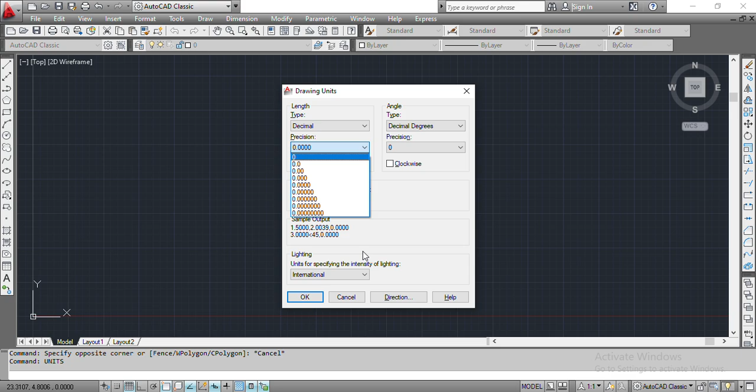So we are going to start with the 3D. To start, we are going to do the page setup, just like normal. We'll type units, and change scale to millimeters, precision to 0.0. Then we are going to set the limits.

The limits: the lower limit is 0, 0. The upper limit is 297, 210, and then we zoom all.

After that, we are going to type UCS icon and type N for no origin, and then change the page on the taskbar to 3D modeling. In 3D modeling, we are going to find all that we want to use there.

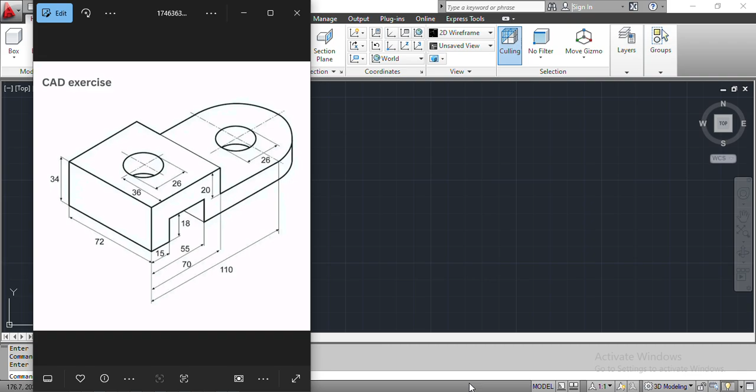Now after this, we are going to start with the whole figure, the whole base. So the whole base is 110 plus 72 divided by 2, that is 36. So 110 plus 36, we have that.

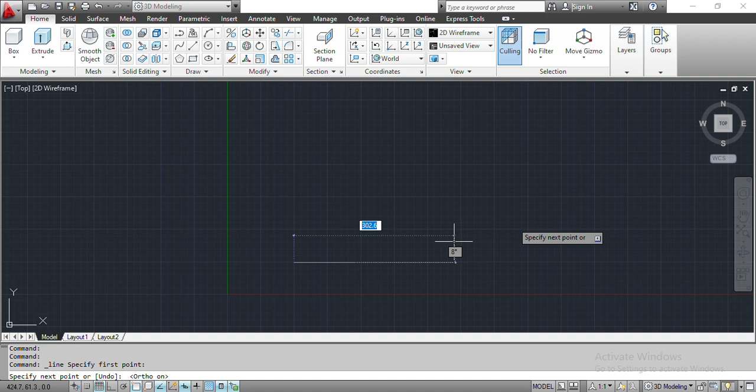So we draw, with ortho mode on: 110, 72, 110, and then close with 72.

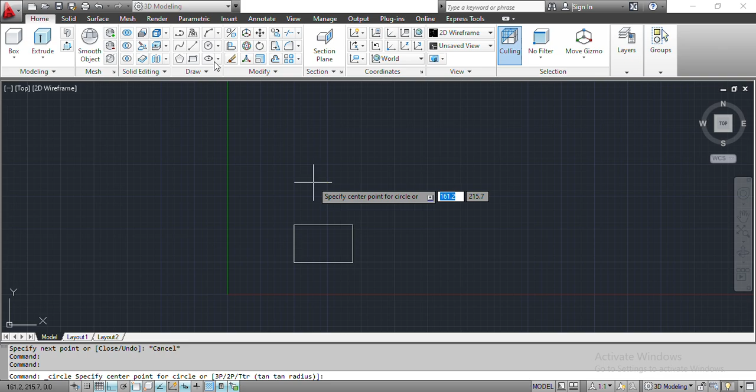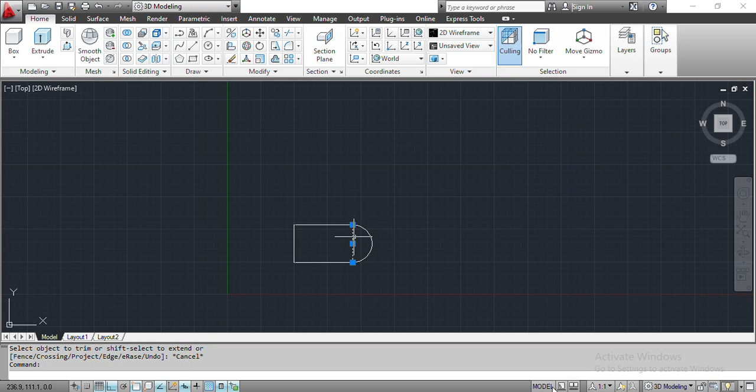After that, we'll get the circle and have it at the middle. Well and good. So after that, we are going to trim, and after trimming we are going to delete that which is not required.

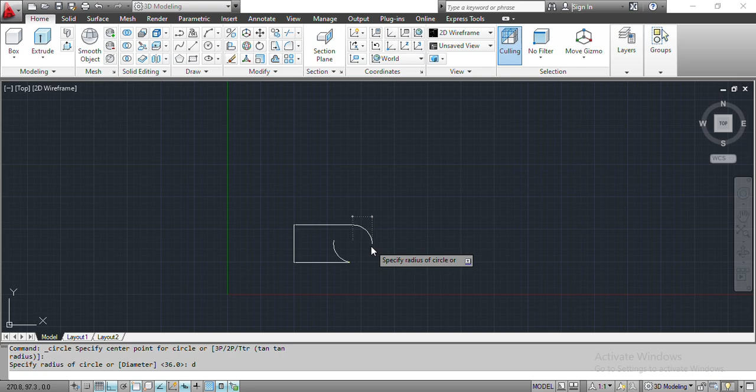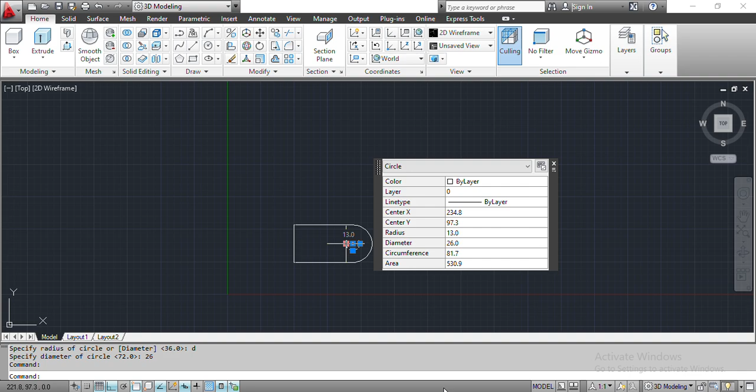We have here a circle of diameter 26, a circle of diameter 26 from the same center. So these two, these ones, we are going to use it ahead.

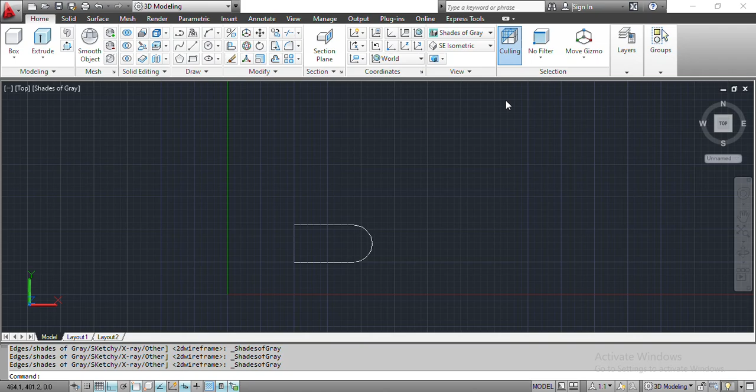So we need to press pull this. Have it to south west isometric, have it to south west isometric, and according to the drawing it is not really that.

Let's go back to the drawing. It's supposed to be like this.

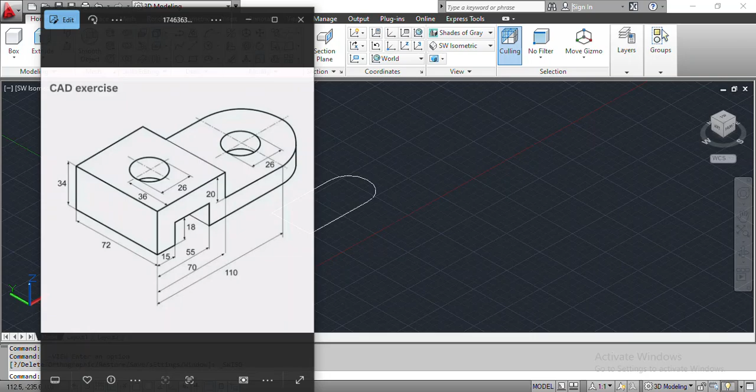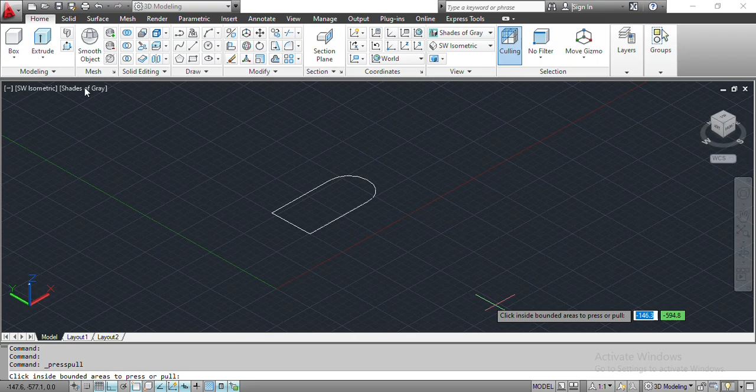So we are going to press pull it to a distance of 34 minus 20. 34 minus 20 is 14. We are going to press pull it to a distance of 14. Good.

After that, we get it to... we have this all done.

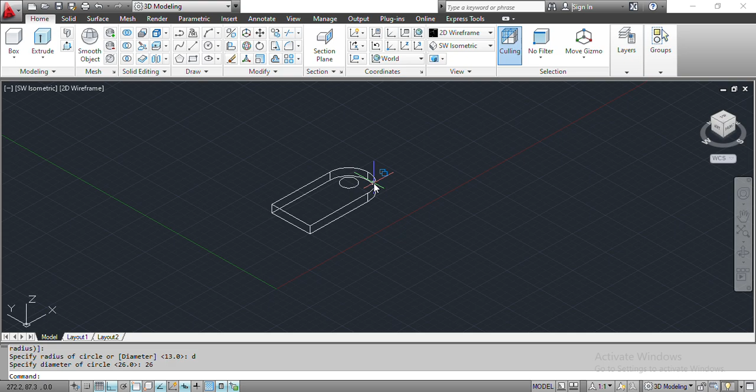So have a circle, and have it at a diameter of 26, and press pull it off.

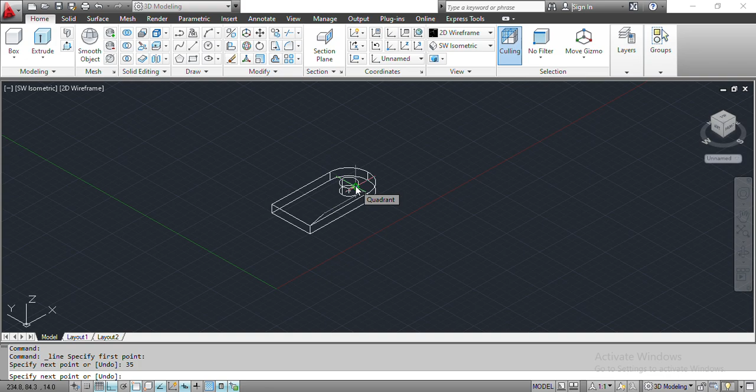And again from here it should go to a distance of 35 and a distance of 36. The midpoint is 35. Ensure you have your ortho mode on.

So instead we can also use copy edges. Then we copy that to a distance of 35.

And we also copy that edge to a distance of 36. Copy the edge to a distance of 36.

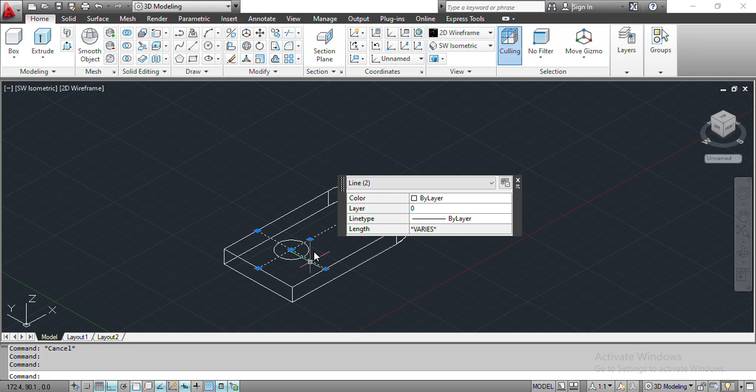So at that point we draw a circle of diameter 26, and then delete your lines, and then press pull it off. Well and good.

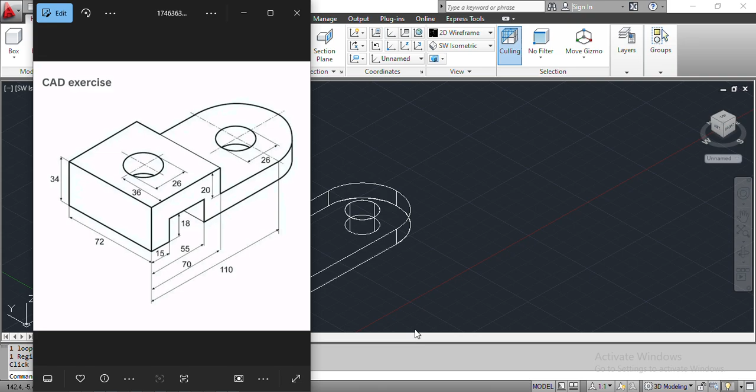After that, we are going to have this done. We have 70. We'll copy this edge to a distance of 70,

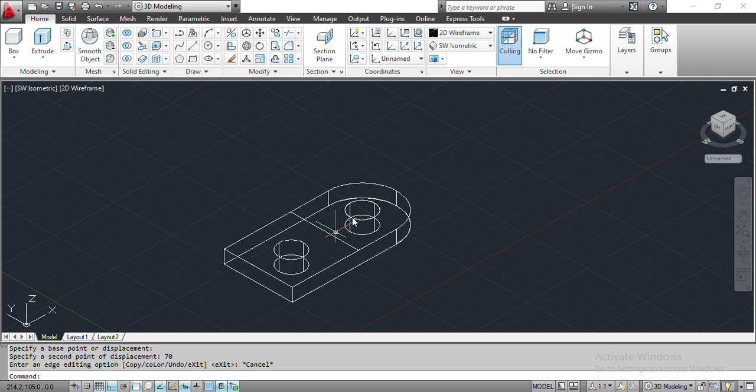and we presspull that up to a distance of 20, a distance of 20.

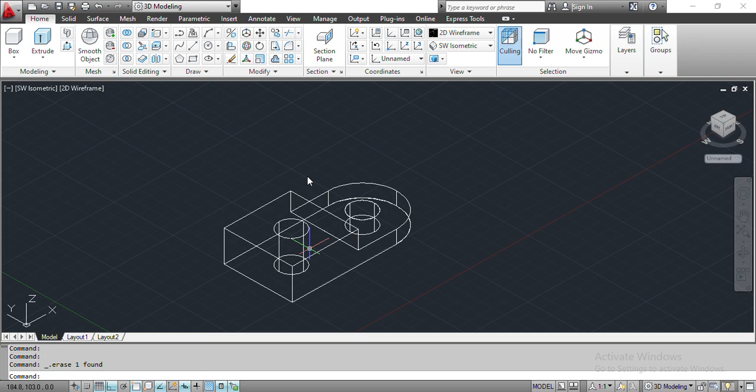After that, we are going to copy this to a distance of 15, and this to a distance of 55.

Copy this edge to a distance of 15, and again copy it to a distance of 55.

After that, copy the line below, a distance of 18, copy,

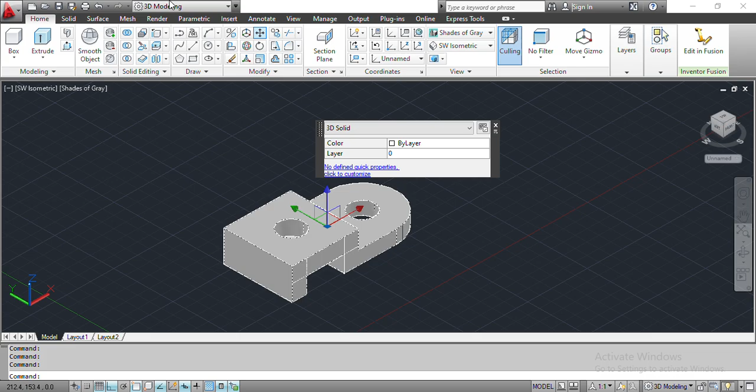Good. So after that, we are going to move it away and have these lines deleted.

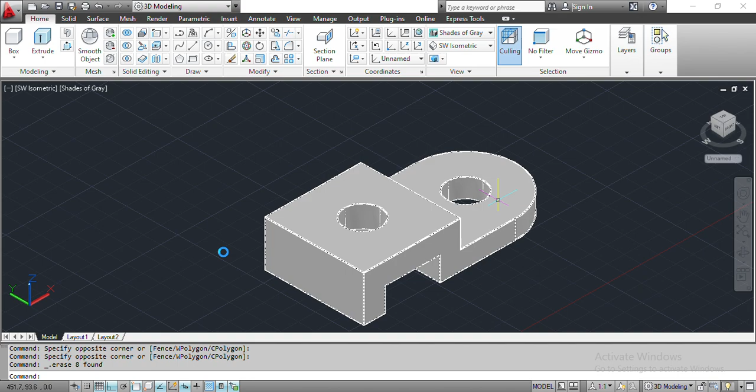So this is our figure. Check it. We have done it well and well.